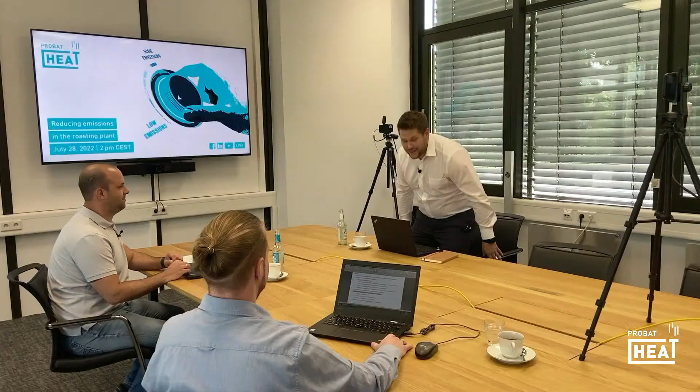On the one side, this is Jan-Philipp Müller from our project engineering department. And on the other side, this is Mark Weimer from our product management. So thank you both very much for being here and taking your time to give us some insights today. Thank you very much. So for the beginning, I think it would be perfect if you, Jan-Philipp, can give us a short classification of the word emission in general.

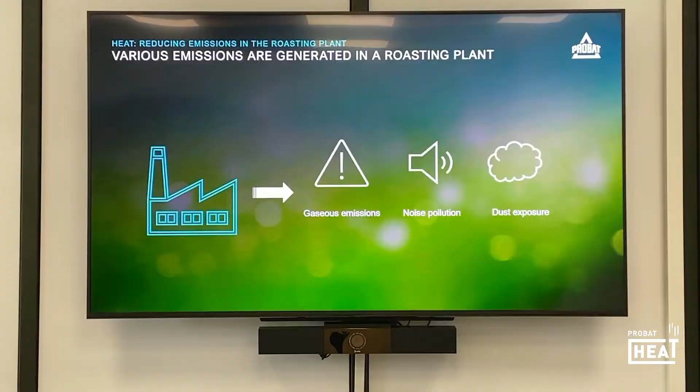As you can imagine, during the roasting process, we have gaseous emissions like the exhaust gas from the roasting air and exhaust gas from the cooling air. We also have noise pollution due to the production, and we also have dust exposure from within the plant. These exposures are mainly spread to the environment. There we have an impact on humans, wildlife, environment, soil, water and air.

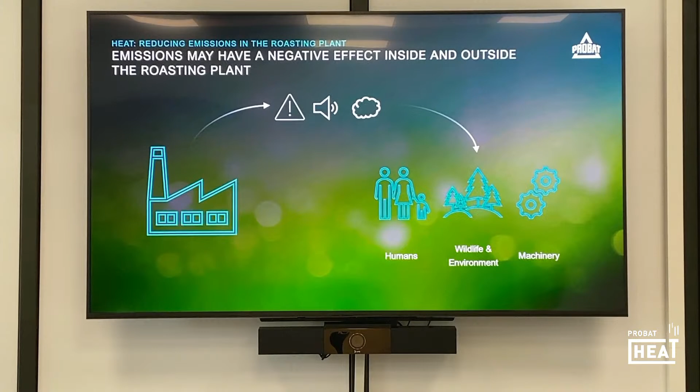And as well as on the outside, we also have these emissions and exposures inside our building, inside the production site. There we also have an impact on the machinery, but also on the employees, the humans inside the factory. So the main target of emission reduction is always to lower risks and harms to humans and the machinery. That's the main issue behind these topics. Yeah, I think it's very important as we deliver machines to our customers that you can ensure that everything is secure and has no impact on the health of the employees and so on.

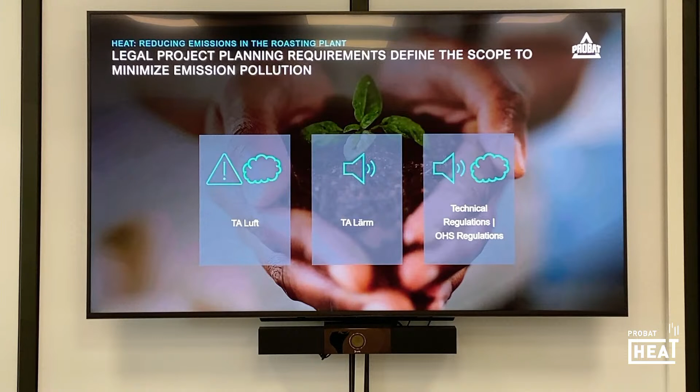Also the TA Lärm, also a German word on this slide, gives us hints for the limitations regarding noise and sound to the outside environment of a production plant. But from experience, in most cases the noise level is limited by local authorities; that is the main limit we have to deal with. If we have a look inside the production building, there are some technical regulations also limiting noise, sound, and dust exposure to your employees. In the English-speaking world, they are summed up under the OHS regulations.

That's the word in the English-speaking world. And that is what we have a look at. During project engineering, we look at these guidelines to fulfill the regulations and the limitations. I think that is very important because some customers are not very aware of the special regulations, and they trust in PROBAT as the go-to partner in the coffee industry, that we know everything, and of course we discuss everything in detail so that everything is working properly afterwards.

Yes. As I mentioned, for a start in a project, it's very good to have this as a basis, but if the customer has stricter or even different limitations, or maybe completely others, we check it and we will handle that then, obviously.

Okay, so thank you for the first theoretical part, and we will now jump into the first topic of emissions, which is the roasting exhaust air. Basically, the ordinance states that a roastery which produces 0.5 tons per day of finished product needs a permit focusing exactly on emissions, and that is why we need to take account of these parts which are inside the exhaust air.

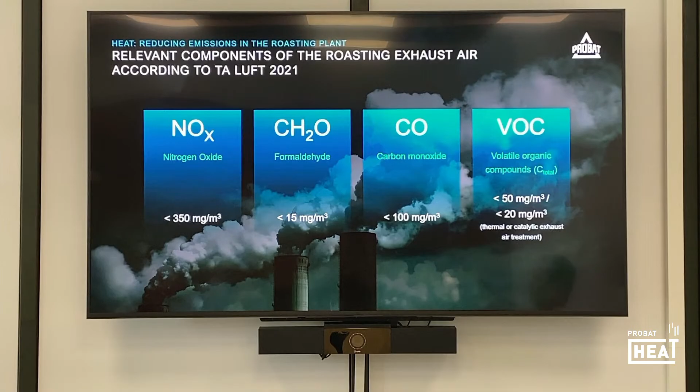And in this specific point, the limits stated by the TA Luft are a little bit different. Because in general there are 50 milligrams per cubic meter, and if we have a thermal or a catalytic air treatment, then we need to take 20 milligrams into account. So these are the regulations we need to handle, and PROBAT now has 3 options to reduce overall emissions of the roasting exhaust air.

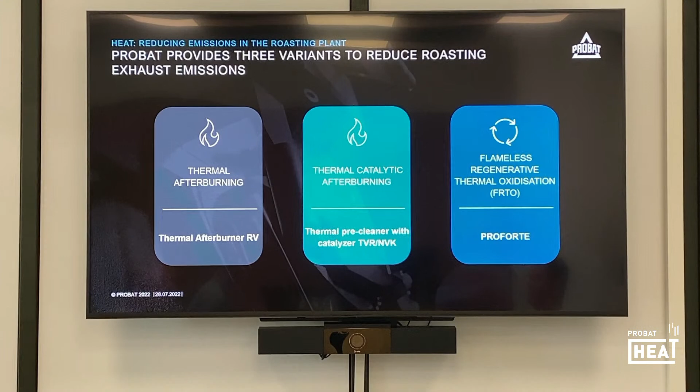On the first part, there is the basic device. This is the thermal afterburning, our thermal afterburner RV. The second one is the thermal catalytic afterburning, where we add an additional catalyzer to the afterburner, and then the high-end solution is the PROFORTE, which is the FRTO. So let's dive into the thermal afterburner, and I will show something on the screen directly.

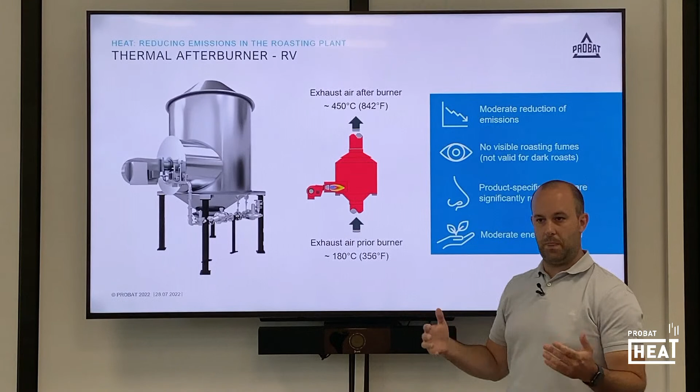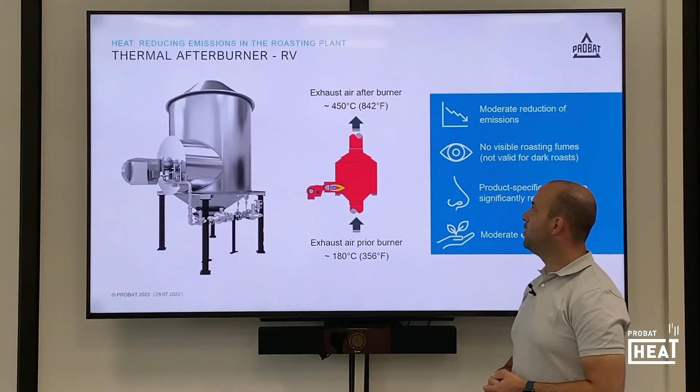So this device is positioned after the roaster, and we have a second burner in the roasting system, and the hot air coming from the roaster, approximately 180 degrees, goes into the system, is heated up by the burner to an oxidation temperature of 450 degrees, and so many of the parts are split up into less harmful compounds, which is the aim of these devices.

So the first step, and of course we will not meet exactly the regulations of the TA Luft in Germany, but maybe you have an example. In many areas of the world, this is a solution that fits the regulations, I guess. So not everywhere on the planet do we have the same regulations. Yes. So there are also parts of the world where it's a really good solution, and of course we can use it there, and it's very common for customers.

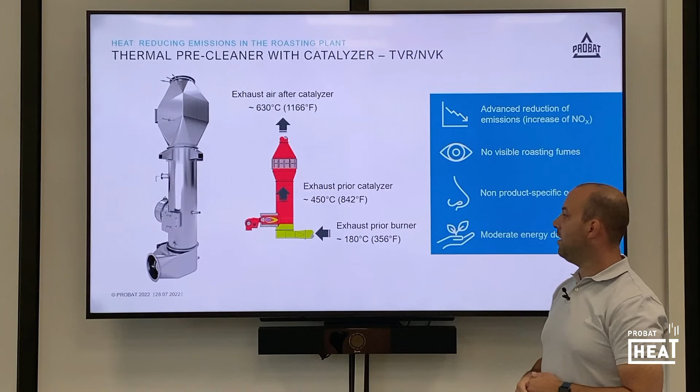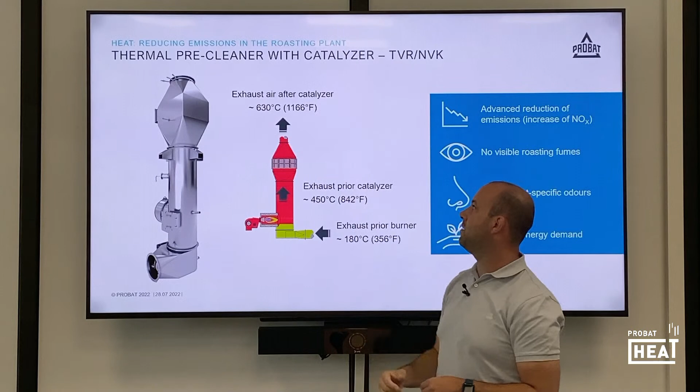Perfect. So here we have the thermal pre-cleaner with the catalyzer. This is an advanced solution to clean the roasting exhaust air. Basically, this is the same one that I showed before, a classical afterburner, but equipped with an additional catalyzer. The air at 180 degrees comes from the roaster, goes into the system, is heated up by the burner to approximately 450 degrees, then is guided through the catalyzer. Due to the chemical reaction, the air is then heated up to 630 degrees, and higher temperature means better efficiency of reducing the emissions.

Yeah. May I add some points? It's also important to add that we use a different burner from the burner we use for the roasting machine. So we have two burners in the system, one for the roasting machine and one for the exhaust air gas treatment. That gives us and our customers full flexibility, because if you change a parameter in the exhaust air gas treatment, you do not change the roasting process, and that is something we think is very important.

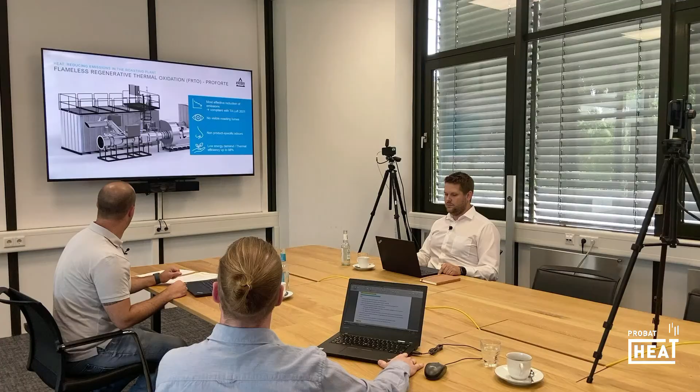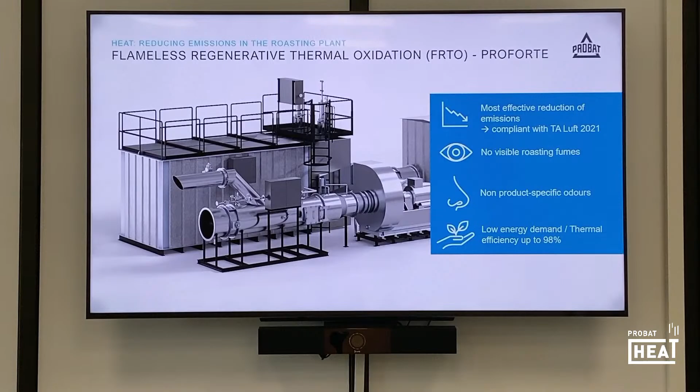Yeah, exactly. Okay, coming now to the last solution, our PROFORTE, our flameless regenerative thermal oxidation, called FRTO for short. This is the state-of-the-art solution to comply with the regulations of the TA Luft, and especially in Germany, this is I guess the only solution actually on the market which is legal. I guess this is also your opinion. Yes, absolutely. If you want to comply with the TA Luft in Germany, there's no way other than using the PROFORTE system, and we have it in many projects and quotations recently.

Well, since 2006 we have first put that in a project. We have, as you said, many of these devices in the field, and the customers are very happy with the solution, I guess. Yeah. And it's very future oriented, because as you mentioned, it has a low energy demand. And at that time, I think it was a very good effort to use low energy systems to be future-proof. Yeah, exactly.

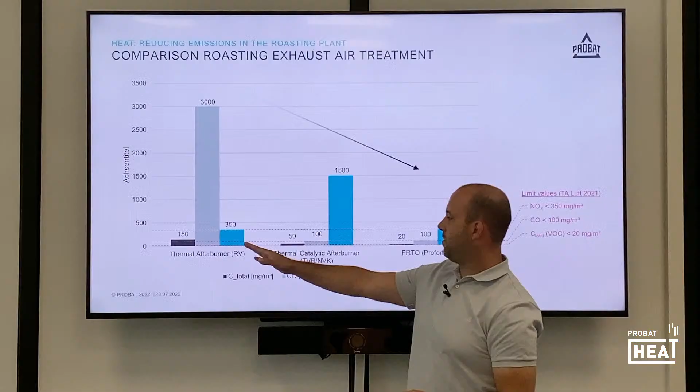Okay, so this slide will give us a short comparison of these three versions. As you can see, the thermal afterburner does not meet the limit values that are set by the TA Luft. The thermal catalytic afterburner illustrates that we have decreasing values. Unfortunately, due to the catalytic afterburning, chemical reaction, etc., the NOx level rises, but of course we also have a solution for that specific point, a low NOx version, to come along with that phenomenon.

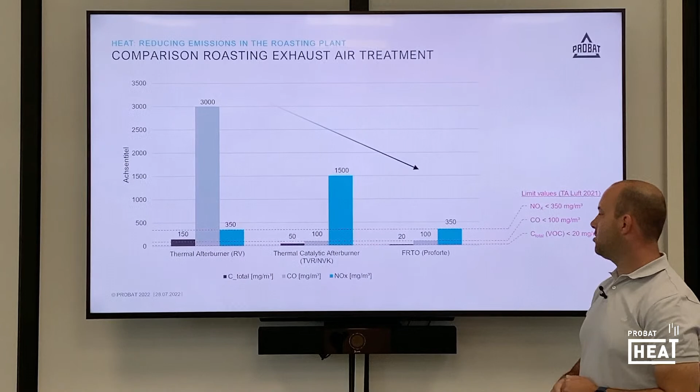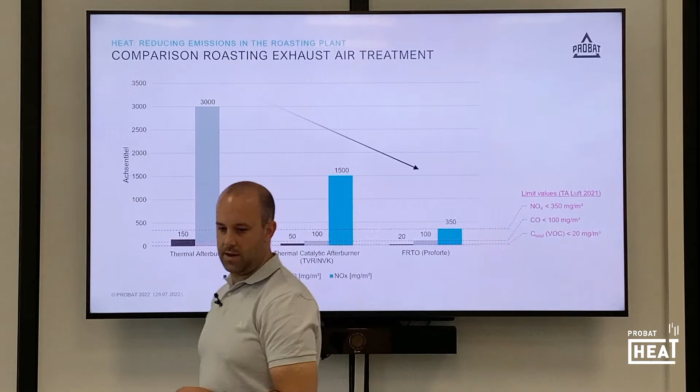And we are working on a solution to comply with the regulations from the TA Luft with a catalytic afterburner. The PROFORTE in this specific case, as I already mentioned, reaches all values from the TA Luft. So it's the perfect solution for our roasters to be able to set up or run a roastery in Germany and to get the permission. Yeah, of course, it's very important.

If we talk about the components in the exhaust, is there any link to the quality of green beans, since it is a biological product? Yes, yes. So if we have a raw product, a green bean that consists of a high level of caffeine, then we also have higher values from the roasting exhaust.

Basically, it depends on the raw material, as you mentioned, so on the green bean, on the sort, on the recipe, so how dark you would like to roast the bean, etc. So it's not easy to make a general statement. Yeah, okay. So we just need to make a specification, and based on that, we can give some answers. We can also do trials here in our R&D center with our customers to find out their specification in this regard. So that is also possible, of course.

And one positive effect of these three solutions is that we also reduce the odors, because odors are also a carbon compound in the air. That is a very good point. And maybe you can add something about the cooling air system, because we just talked about the roasting exhaust air, but there's also a solution for the cooling exhaust air.

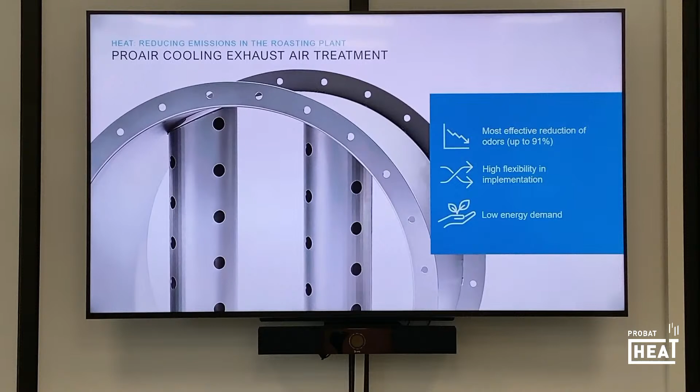For those of you who don't know the ProAir system yet, I would like to give a very short explanation of the function. Basically the ProAir system consists of an injector cabinet, which will be installed on the cooling piping system of your roasting machine. That is where the magic happens, because the ProAir system uses a non-thermal plasma process to reduce the odors in the cooling exhaust air by up to 91%, which is very unique in the coffee industry right now and makes it a very state-of-the-art product. Furthermore, it has a very low energy demand, so it is the perfect solution for roasteries near residential areas.

As many of you may remember, we produced a special heat session about the ProAir system together with our colleague Thomas last year. And since we released this heat session video, the number of requests for the ProAir system has increased constantly. So Jan Philipp, maybe you can give us some insights into your daily work in project engineering. What is your opinion, and especially what do you think about the possibility of integration into existing roasting systems?

Yeah, so I'm absolutely with you. In the offers with the ProAir system integrated, as well as the projects we have right now, the number of customers who want to have this ProAir system is increasing. And from a planning or project engineering point of view, it's a system with a very small footprint itself.

It has a filter unit, a small fan, and as you said, where the magic happens, you only need a small piece of pipe, and you can, more or less I would say, put it in any existing system as a retrofit, as an add-on. And not only PROBAT roasters. So that is also a great advantage. Yes, so from my perspective, it's a very good system as well for the layout and the planning. You always find space to put it in there.

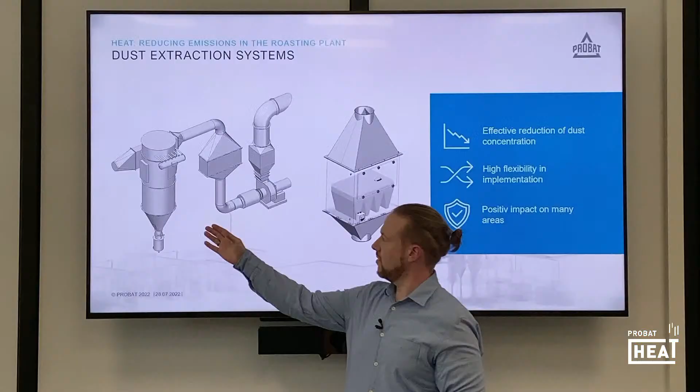But as well anywhere green beans are transported in a pneumatic or mechanical manner and conveyed or discharged to any point in the plant. Those are the points where we need to consider dust extraction. And basically the solution for that is also quite simple. You need a high air ratio to extract the evolving dust from your working site. And for that, in summary, we have three solutions. The first would be the cyclone, which is not shown on the slide here, but in most cases we use filter units, and with the help of the filter units we can reach dust limits lower than 20 milligrams per cubic meter.

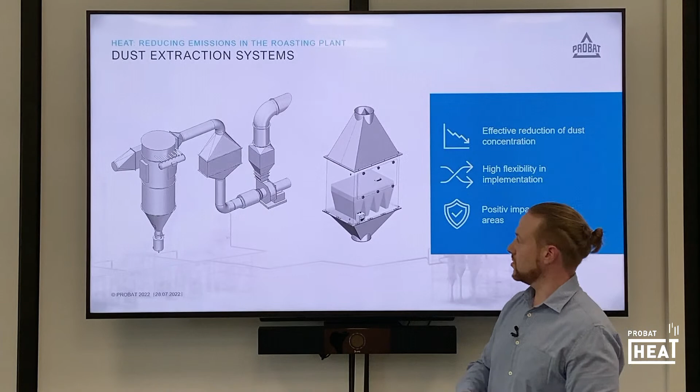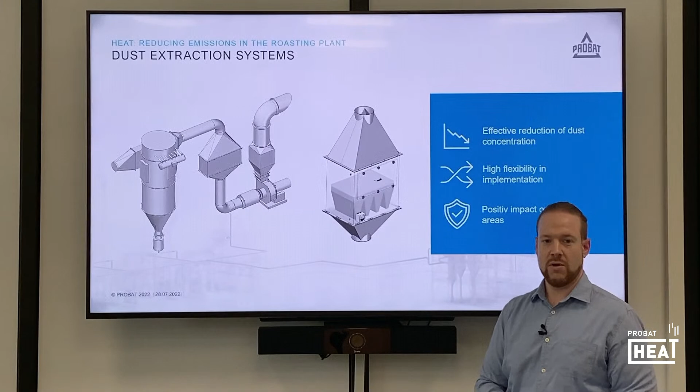And if you'd like to go a step further and want to release the air back inside the building, you can also use our fine filter unit, and with the fine filter unit it's even possible to reach values lower than 1 milligram per cubic meter. And I think a big advantage of this fine filter is, for example, if you heat up the ambient air in the building and just put it outside, that's a lot of energy waste. So we can reuse the energy stored in the air, which saves energy. I think that's also a very good point. Yeah, it depends on the air balance the customer wants to have in his building. These are the points we discuss with our customers.

With the topic of dust extraction, another often discussed point comes along, that is the ATEX guideline. The dust extraction system is very important, so we need to talk about the ATEX guidelines at this point, and also keep an eye on that to avoid explosions or hazardous situations. Not to mention that if you do not keep an eye on your dust extraction system, on your dust treatment, it can cause lung injuries to your employees. It can cause dirtying of your machinery and your production site. So it's always very important to look at your dust emissions inside the building. And that is what PROBAT stands for, to give our customers this knowledge as well.

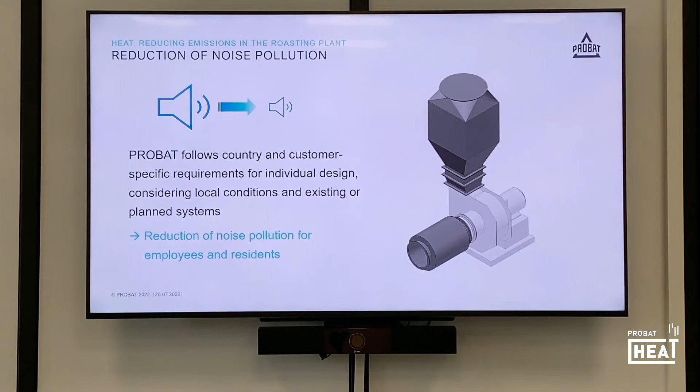So there, as you said, unfortunately there's no fits-all solution, it's always a point of discussion. But to recap, we always have a solution for that. Yeah, that is a good summary of this heat session today. So it's very good to know for our customers that we are aware of all these challenges that come along with the general emission in a roasting plant, that we have a wide range of possible solutions. But of course, we can also get into discussion with customized solutions. And I think that is very, very good to know for our customers, that we are able to provide them with any kind of solution.